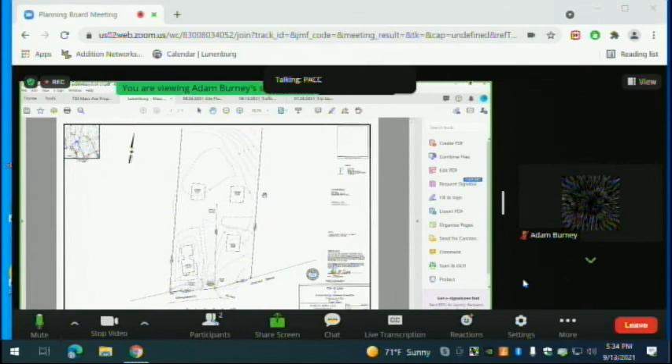Those that are familiar, there used to be about a 15,000 square foot barn that was falling down that the chief of the fire department begged us to tear it down, so we kindly did that. And so what we're looking to do is utilize space that was already being used for commercial purposes and set it up so that we can turn it more into residential.

We're going to put - our proposal is for 3 additional 1,700 to 2,000 square foot homes back there, spread out evenly so that they'll each have about a half-acre lot.

And our intent is to call it a PUD. They'll share the driveway so that we don't have multiple driveways coming off, they'll all share the same one coming onto the street. And we definitely believe that once the easement is taken care of from the property owners next door, that we think that that'll be the safest way to put this proposal in place.

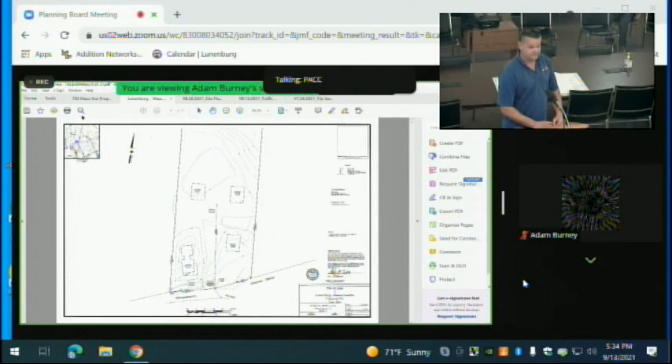So, questions? Anyone from the board have questions?

I thought that we weren't allowed to have more than one dwelling on a lot. Well, the bylaw allows the planning board to approve more than one dwelling on a lot.

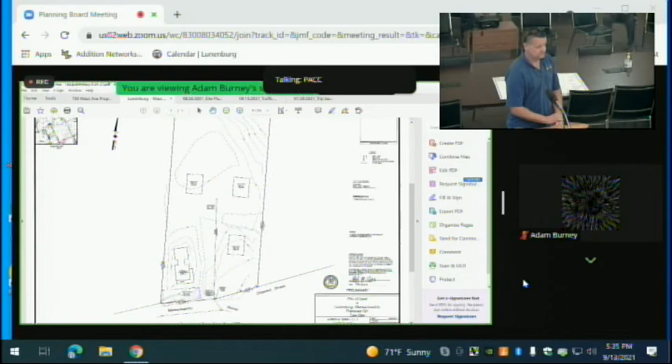I don't think it's something the board has done regularly outside of things like PRDs or the multiple - I always forget what it's called - the section before the PRD where you can do multiple housing types on a lot, and both of those have minimum lot requirements which are in excess of the 4 acres.

My concern with the project - I understand the concept, but it is completely contrary to what we've done in the past, and I believe contrary to the intent of our bylaws. So I have significant concerns about the proposal, as well as the common drive. You're proposing one drive for 4 lots, and would you be proposing a homeowners association, or how would the care and maintenance be done for the driveway and the sewer line?

Yeah, our goal is to set it up like a planned urban development or condo type situation, similar to what they're proposing for next door, where they're going to have an association fee that takes care of essentially any common area and the driveway maintenance throughout the fall and winter time.

We do these all the time out there in Orange. Could be, we'll put 2 homes on one lot, on 1 quarter-acre lot, and then we'll just have 1 driveway. They'll have an association fee that essentially takes care of the driveway.

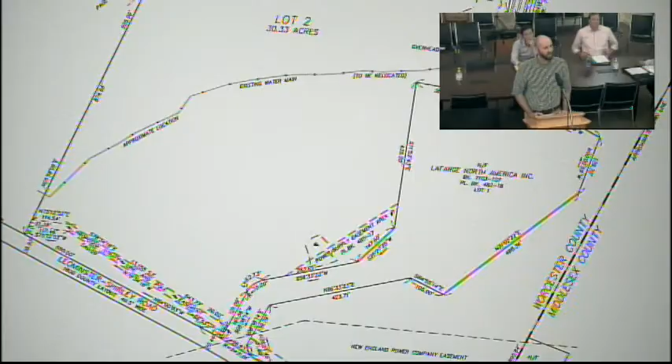The existing water main shown on that plan, is that a town line or is that Keating's? It's a private Keating line. Okay. So that's part of the Lunenburg Central project, that's going to be relocated.

I'm looking at the review response letter from Hannigan Engineering dated August 25th, and this was in response to the review by Jeff Wall.

One of the issues was that there were no trees between Leominster Shirley Road and the truck parking area, and you have added those?

Correct, that's associated with the site plan approval. This is for just the A&R right now. Okay, thank you.

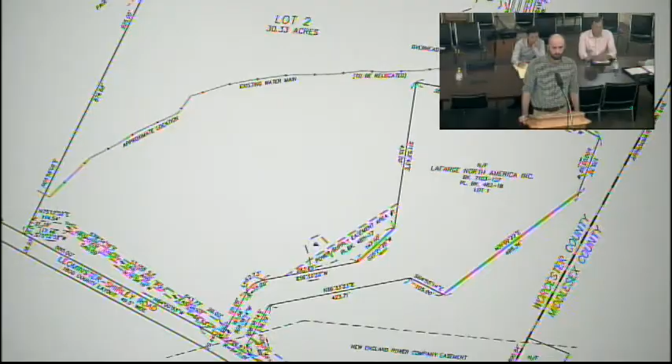Right, so we're just acting on the A&Rs currently. Yeah.

So the only thing I see in question is that it landlocks parcel A and B.

That is being purchased by the JMC TBG group and will be consolidated into this lot as well. Okay, very good. They've purchased both parcels? Yes, sir.

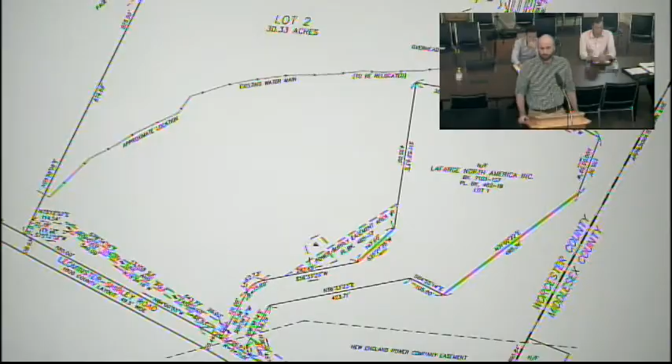Mr. Chairman, I would make a motion to approve the A&R plan for 1,263 Reservoir Road and 435 Leominster Shirley Road, to be known as 475 Leominster Shirley Road.

I have one point. So the entire frontage is covered by a utility easement. Correct, that would be for the water line relocation itself. It says utility line and pole easement. And there are also several utility poles that cross the frontage of the property that feed the Keating plant, so that's all being encompassed in one easement.

So we've got something about subdivision requiring less than 30% of the frontage be encumbered by an easement? But it doesn't actually cover the frontage, well, because it's set back off of the frontage. The frontage is the line between the two sidelines adjacent to the road. So they do have to cross the easement once they've entered the lot, but they own the frontage. The frontage is not, the easement isn't over the frontage adjacent to the road. Yeah.

On the plan, it's described as a proposed utility line and pole easement, but I believe those poles are there currently, correct? Correct, so this is all contingent on site plan approval and construction. But the poles are there without easement. Yes, and the water line isn't there, but will be there. Correct. The water line that they're removing from the center of the site.

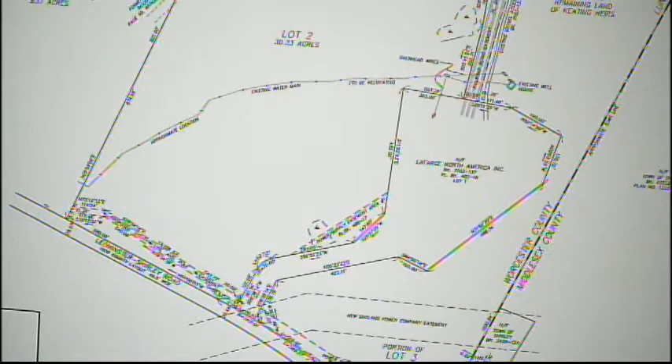So their building isn't on top of it. But you just said the water line isn't there and will be there. Correct. So they're going to take this approximate location water line. Yeah, they're going to probably just cut and cap. I don't, are you planning on leaving? I mean, whatever, but then they're going to relocate it down here. So this water line is going to go away, and it's going to be in that easement with the poles.

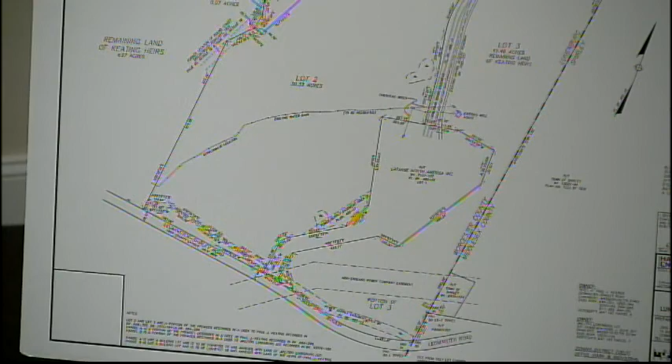Mr. Chair, may I say something on this? For the record, Bill Hannigan. Yes, go ahead, Bill. The pole easement is for the existing poles that feed the Keating property. As we're taking this piece of land away from Keating, we need to protect their rights to get the power over that section of the land. So that's what the pole and power line easement is for.

The water line easement to be relocated is anticipated to be relocated towards the front of the property, but will probably not end up being adjacent to the right-of-way, because that's also where, through the work we were doing with Rob Oliver, we're going to be creating an easement along that section of the road for highway purposes. So if you look at the new site plan, that water line is now shown going through the middle of the front of the parking lot, and that's where it's anticipated to go. All of this is based on the anticipated location when they actually build it, when they build the water line and relocate it. We're going to physically locate it and create the easement around it so that it's where the water line ends up, because there may be other factors that come up on both the JCB side and the Keating side that change it slightly. But the intention is to maintain the water flowing from the pump station to the Keating property.

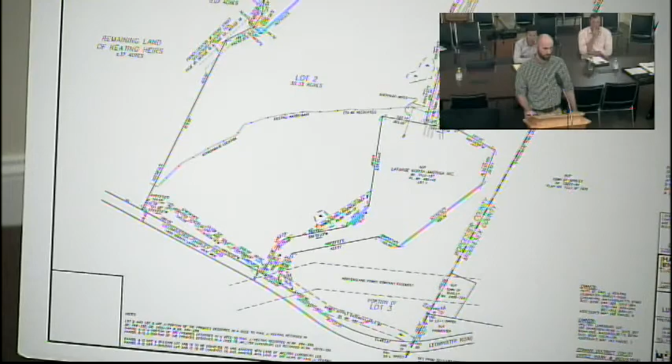Once that's done, that would be created through an 81X plan, not endorsed by the planning board, but just an easement plan essentially, and that would go through the town process for acceptance of the easement. So that would be an easement to the town for maintenance? Correct, yes, and that's at the request of Rob Oliver.

Well, that is at the easement, at the frontage line. Yes, it's essentially an extension of the right-of-way for highway purposes, but it's not going to be owned in fee by the town - the easement would be there.

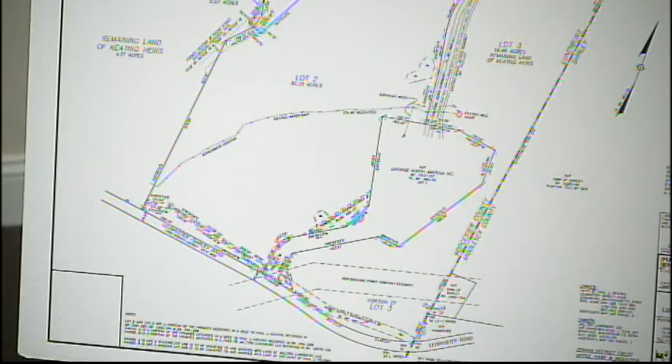So a portion of our bylaw stipulates that no more than 30% of the frontage of the lot can be encumbered by an easement. Adam's going to look up that specific language to make sure that before we proceed, we don't put you in a tough spot here.

Well, I think the easy fix for them would be to just give that parcel to the town rather than making an easement. Yep, that could be part of it, and then depending on, you'd get a better idea from that plan - does it show the utility line easement?

So it says, except for public utilities in place at the time of the passage of this provision, no more than 30% of any required frontage shall be encumbered by easements, drives, access strips, or ways of any type.

So the way I would read this is that no more than 30% of required frontage - so if you have 500 feet of frontage, 350 feet of it could be easement, and then whatever 30% of 150 is, another like 42 and a half feet. So you could be upwards of 390 feet of easement, and the remainder would have to be quote-unquote free and clear.

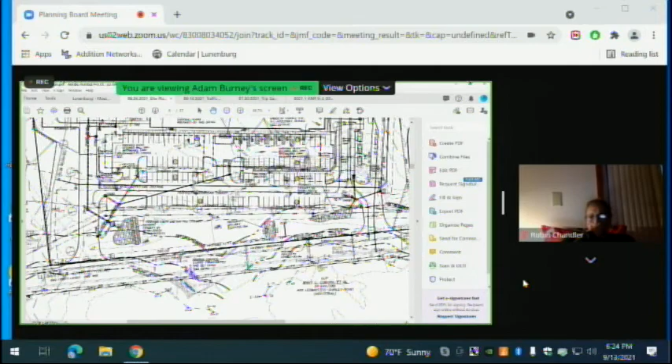Some of the other modifications were relative to drainage and general engineering practice, and correction of some notational errors on the plan, but besides that, the main portion of the work that was modified was along the frontage of the site.

In addition to this, we are proposing to provide additional signage along Leominster Shirley Road, as it was a concern raised by both the board and the Board of Selectmen. So we are providing additional signage for that as well. In addition, since the previous meeting, we have met with Conservation, and they have granted us an order of conditions for the proposed work within the buffer zones.

And that's generally it. If there's any questions from the board, I'd be more than happy to address them.

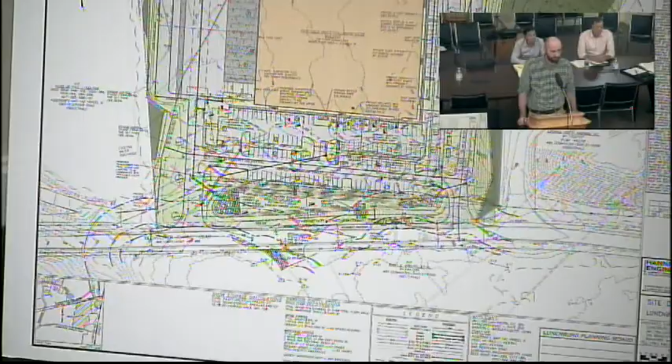So at our last meeting, one of the primary concerns was traffic. And from my perspective, a lot of the issues revolved around the intersection of Reservoir Road and Leominster Shirley Road, which is just west of your site. I know that area well.

I travel it frequently. And Mr. Burney actually brought it to my attention that a couple of years ago, Keating, the quarry operation, started improving the sight lines at that intersection. They cleared a bunch of vegetation along the road, and that's about as far as they got. But with a little bit of earthwork on that corner, I think it would be possible to greatly improve the sight lines coming up to that intersection.

I don't know exactly what's involved in terms of working with Keatings, but clearly you guys have a relationship with them.

That intersection's been an issue for a very long time. It's not necessarily your issue to resolve, but at the same time, looking at hundreds of trips per day being added to that intersection is of concern. So that's something I wanted to bring forward as potentially a cost-effective solution that doesn't involve repaving things and lights and grading and so on.

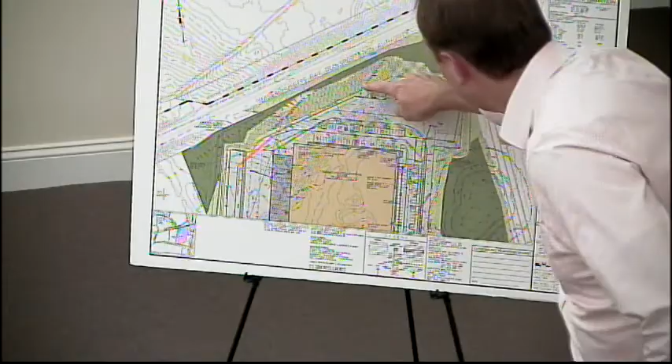Yeah, thanks, Chris. Can you just point that berm out? Yeah, this dotted line here runs up significantly all the way back to the site adjacent to the railroad. Okay, so that will help stop the noise with a barrier, to help mitigate it to the extent it were actually to be audible. Okay, thank you.

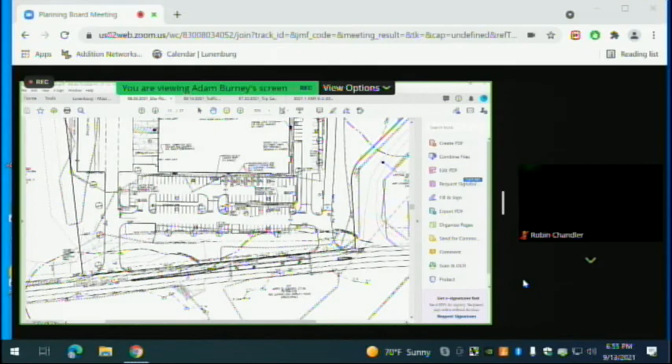This driveway, if you hold on one moment — this is the entrance, just a color version of that. This is the middle point, if you will, of the actual site itself. As you can see through here, here's the access drive that continues in a northerly direction.

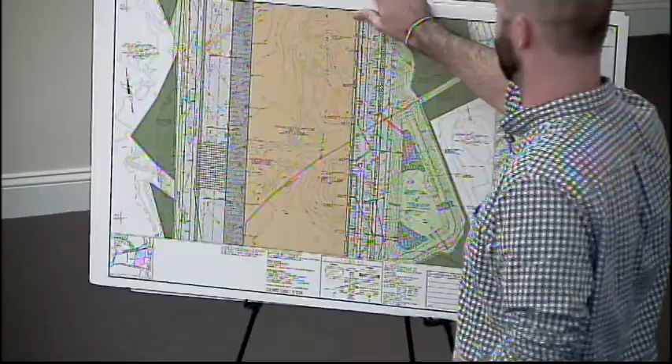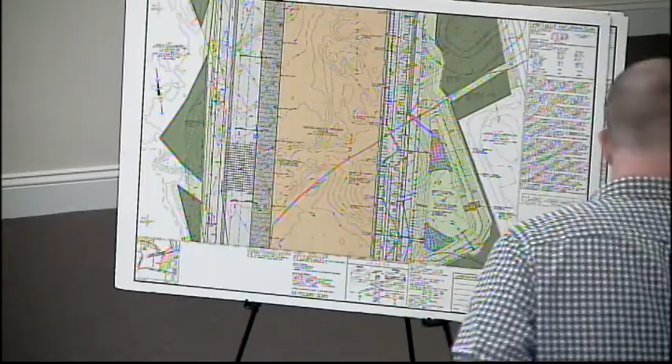Can you point, sir, so we have some reference? Are you able to go to the next page? I can't keep up because your plans take forever to load, so as I scroll it lags. Why don't you turn the plan? Because it's on camera for people at home to see. Want to sit over here? Why don't you come sit with us, Dave?

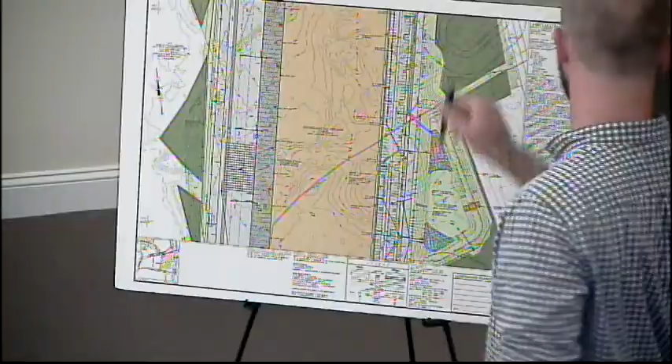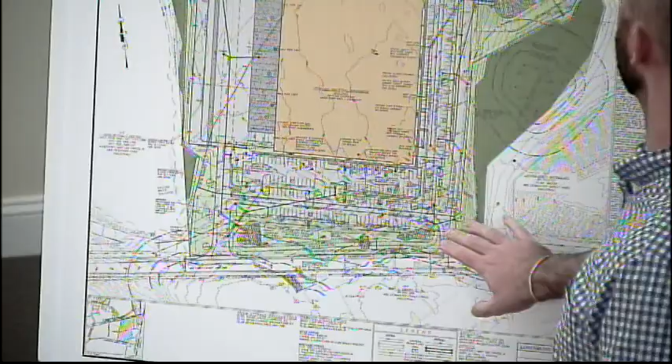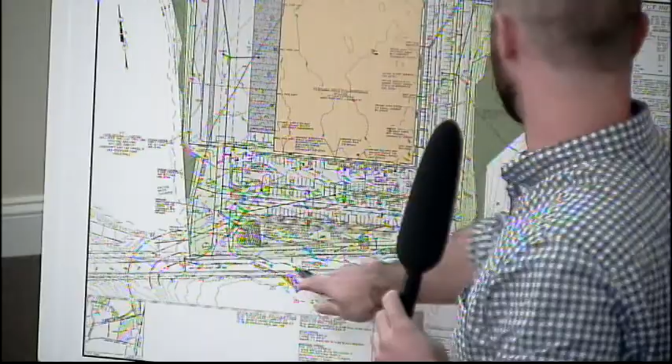Okay, orient me, where's Shirley? It's on the bottom of the plan. So this sheet here, sorry, there's a light so I'm trying to... and sir, if you could grab the microphone. Thank you, does this work? All right, so as you can see here, we have Leominster Shirley Road along the bottom of the page.

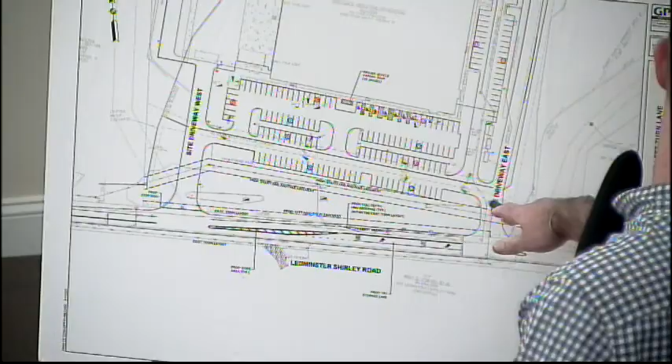This will be the truck turning lane improvements I previously mentioned. As you can see, eastbound lane, right here there will be a dedicated left-hand turn lane that enters into the property, into the main driveway entrance. So this was the sheet I just went over.

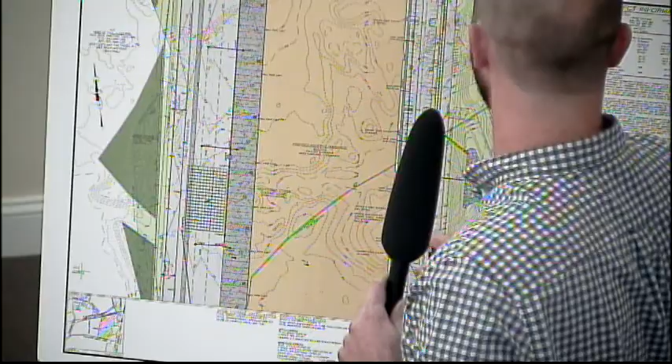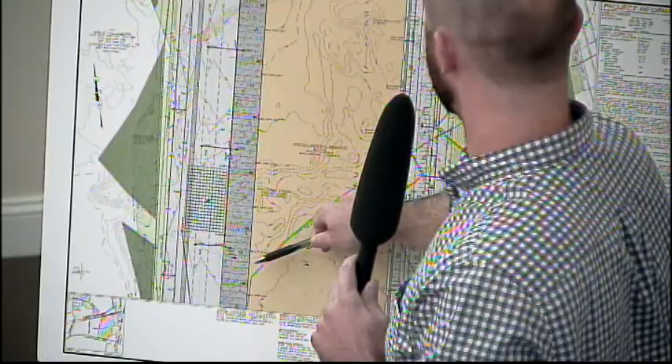This next one, as you can see here, running along this portion of the site is the truck access lane that continues in a northerly direction. You have additional parking with the actual truck storage bays located along the westerly side, abutting the Keating property or the Keating facility.

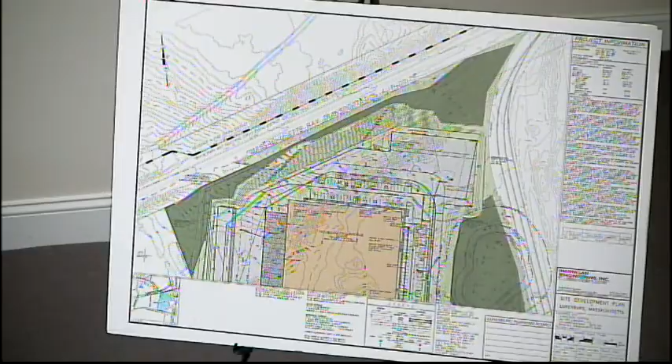And how many doors are there, sir? Off the top of my head, I do not remember. Approximately 71. 71, yes.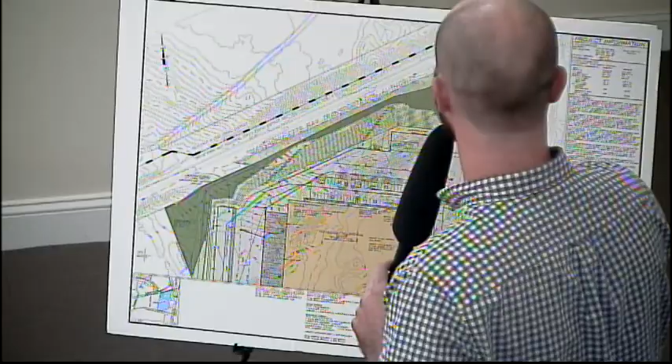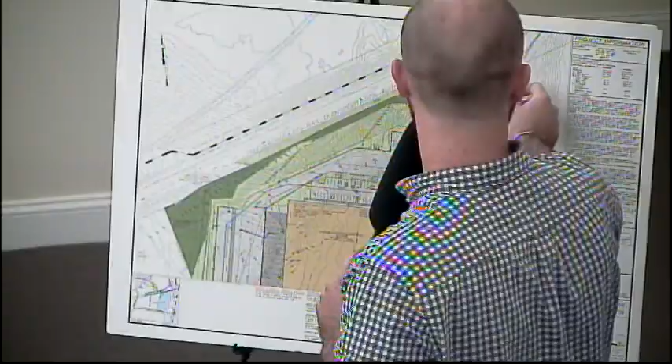So as you come across the northern portion of the site, just to orientate ourselves here, we have the Lafarge Railroad spur along the easterly side of the property, and you have the MBTA line, our train system, running along the northerly portion of the site.

You're right in the way, you're blocking everything, I can't see. Sorry. If you stand on the other side of the easel the camera will get you. Yeah, no problem, there you go. I apologize.

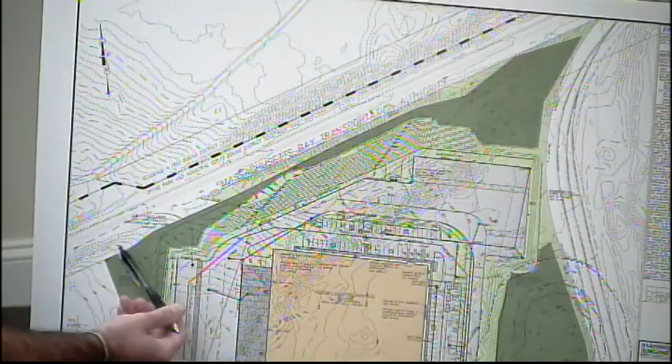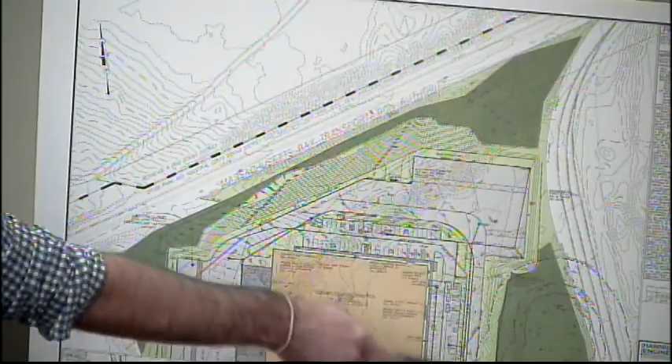Okay, so we have the MBTA along the northerly portion of the site. You have the Lafarge concrete plant located to the east of the site. So as I stated earlier, the dedicated truck access lane continues in a northerly direction, loops around the back of the site, and then into the loading area dedicated on the westerly side of the building.

So what is all of that on that northerly side? I guess that would be approximately a 25 to 30 foot cut into the hill. So the site itself is set deep into the slope, creating a natural berm in addition to the railroad spur itself.

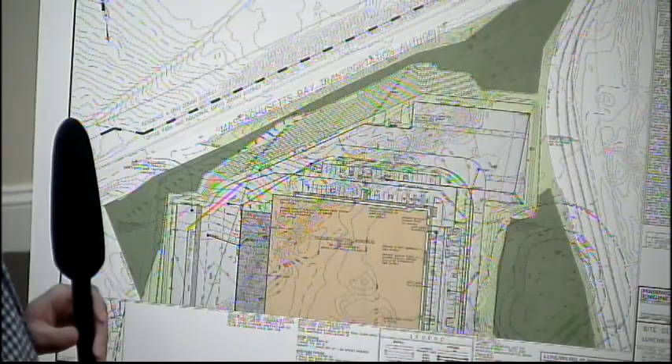So going around, there's no entrances on that northerly side of the building? And then do they start right on the westerly side, right on the corner there? Correct. So what is the distance from there to the railroad track? Because what you're cutting out right there where the Lafarge spur is, literally right on the other side of that train track, 25 feet from that train track, is my property.

I understand, yes, if you've got a high berm that's definitely going to deaden some of that sound, but it's not going to deaden it all night long at 12, 1, 2, 3 in the morning when those things are running 24/7. That's the thing that concerns me about the town allowing something like this to come in. You've got to think of your residents, and if there's not going to be limitations on hours, that's a huge detriment to the sanity aspect of being home and in your safe place, and all you hear is trucks all night long. That's literally right there now. So that's my issue with the noise.

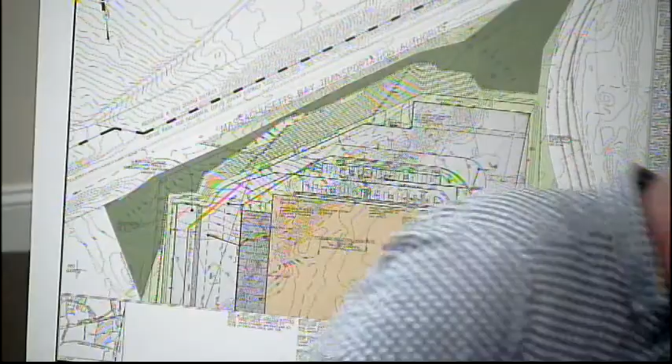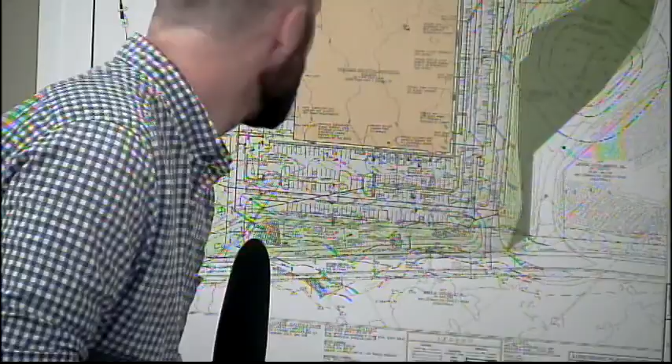And then as you come to the exit point of the site, there will be a dedicated exit lane, which will allow for truck traffic to go either east or westbound. As part of this, we're widening that curb line, or the shoulder line, a bit more, so a truck can have the adequate turning swing maneuver in order to get out onto the road without crossing into opposite lanes of traffic. And that's essentially the general traffic pattern.

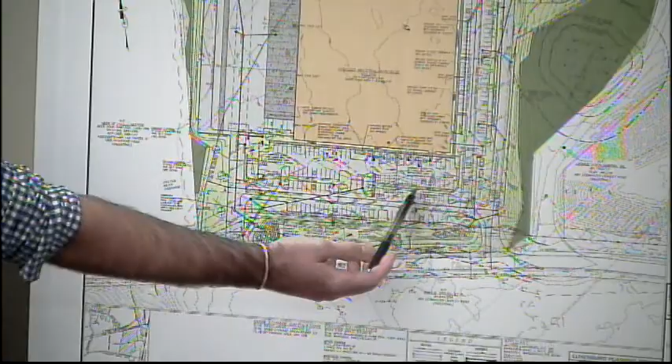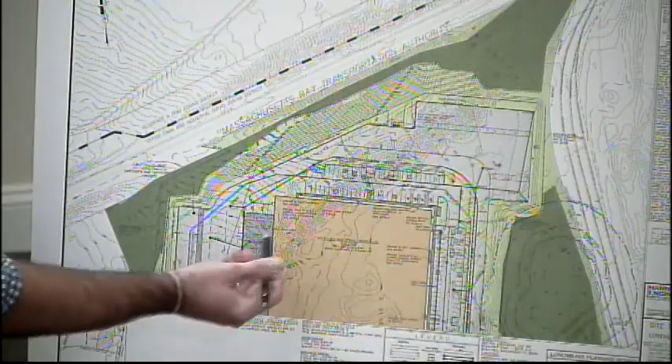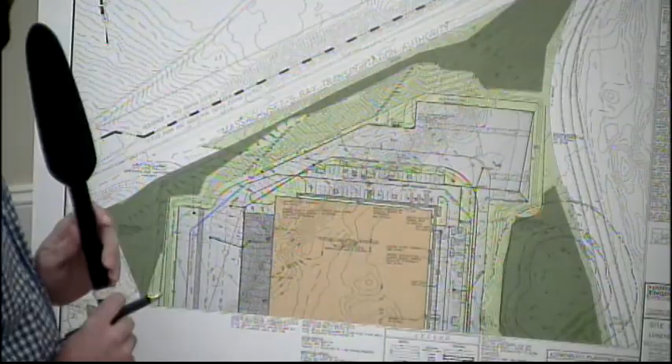Where is the parking space for the employees? The truck or employee parking spaces are dedicated along the front portion of the building, as well as along the easterly side of the building, along the entire length, and also with some additional spaces along the northern portion of the site, or building face, in case there's a double tenant of some sort. How many spaces have you provided for? We are providing 405 spaces. And that's for employees and visitors of the sort.

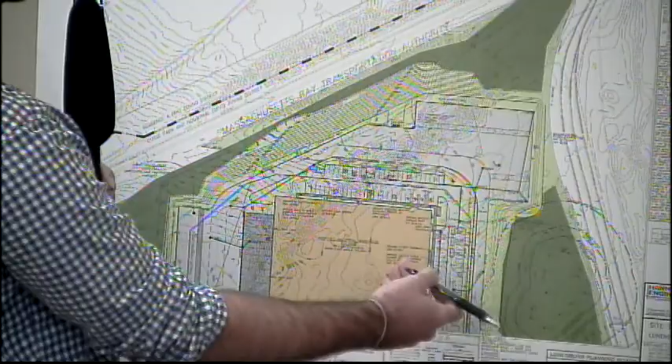Could you locate for us visually the wetland area that's down in that quadrant? There is a wetland series located along the rail spur from the Lafarge property. There is an isolated wetland there. Relative to environmental permitting, I know it's not the purview of the board, but as part of this we are satisfying the requirements of this local wetland ordinance, or bylaw, by maintaining at minimum a 50-foot buffer around that entire wetland.

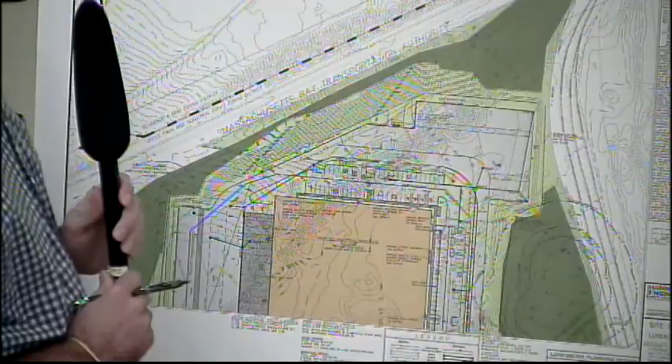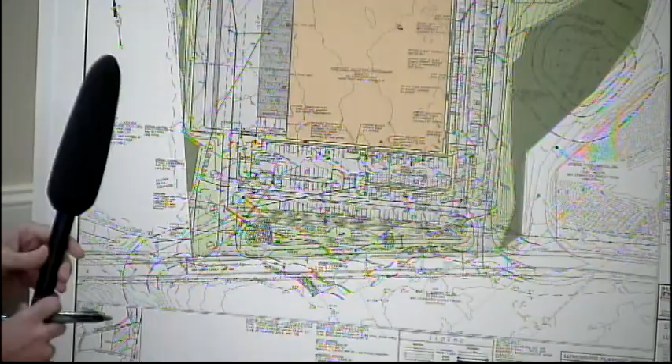I have one more question that I've received. Thank you, this has been very helpful. No problem.

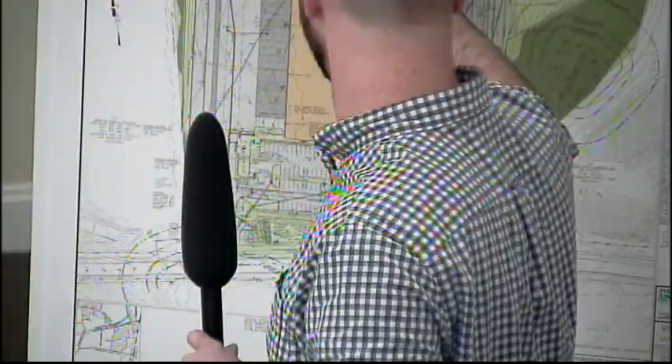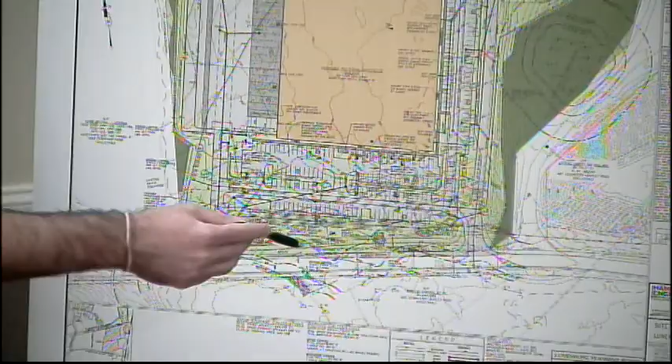Sorry, I can briefly go over that a little bit further. So it's the intent that as part of the operation of the actual facility itself, all employee traffic is going to be directed back through the parking areas dedicated purely to employees, so that employees are not technically going through the loading area. Okay, so it's more of an operation standpoint.

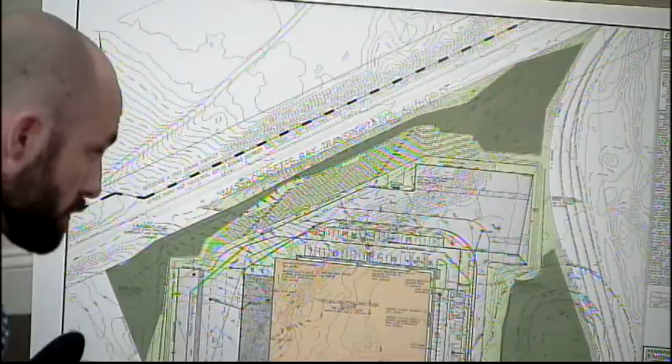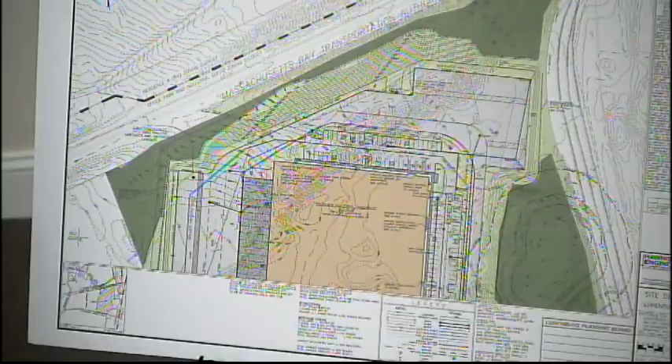So even the people parking in the northerly portion still have to come all the way back around? Backtrack basically? Correct, there's a connection there though, for fire purposes, so if a fire truck does need to get in and around that area, they can without having to go all the way around the building. But from a purely operational standpoint, the intent is all employee or pedestrian traffic looping itself back southerly around the building and exiting on the westerly side. Thank you.

Did you have a question? Did you have an answer on the hours of operation, Adam? There's nothing in the bylaw. I'm looking at the rules and regs. Ms. Perkins, if you'd like to go ahead. Can you unmute her?

Thank you, I was just, thank you Paula, on the lighting - that was a great question. So I just started thinking, will I not be able to see the stars at night anymore from my porch if the whole site is all lit up around the railroad tracks?

Thank you, we are dark skies compliant. Yeah, we do require dark sky compliant lighting, so it's all 90-degree cutoff, down facing. Our experience recently, and what I've seen in other communities, is most folks are using LED lights, so we're looking at 16 to 18-foot poles as opposed to the 25 or 30 we were seeing before. They don't have quite the same spread as the metal halide, and they definitely don't bleed horizontally as much.

Thank you, and Mr. Burney pretty much just stated what I was going to say, that the lighting is very concentrated to the actual developed portion of the site. It's not overspilling onto other areas of the property or the abutting properties.

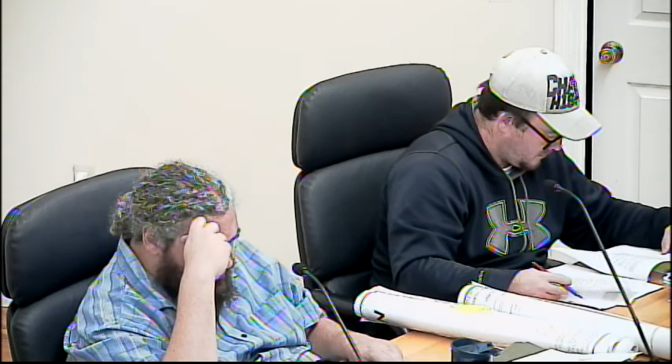Do we specify anywhere else who is at that meeting? We don't. You certainly could modify this condition to do so. Do we need to modify this condition to do so? Otherwise, I'm turning to those with more experience on the board than me.

Is that even relevant? I would infer that if it's for erosion control, it would either be the review engineer or the conservation agent, or both. Especially where this project is in the Riverfront area, the conservation agent will be looking to ensure that erosion control is in place prior to work being performed. I would ask other members of the board if that seems relevant or if I am overthinking this one.

And I'm very open to, Matt, you're overthinking this one. I get that a lot.

Well, as Adam said, there's multiple reasons for people to meet, and there's only a few reasons for specific groups to meet about something, so unless we got into the nitty-gritty of a meeting about what.

So as far as I don't have a strong feeling about stating who has to be at the meeting. I mean, is this an industry standard thing that would happen? If there's erosion control that's required, you would want it installed before you do too much site preparation or construction, so it wouldn't be uncommon for it to be inspected prior to, once it's installed, to be inspected to make sure it's installed correctly.